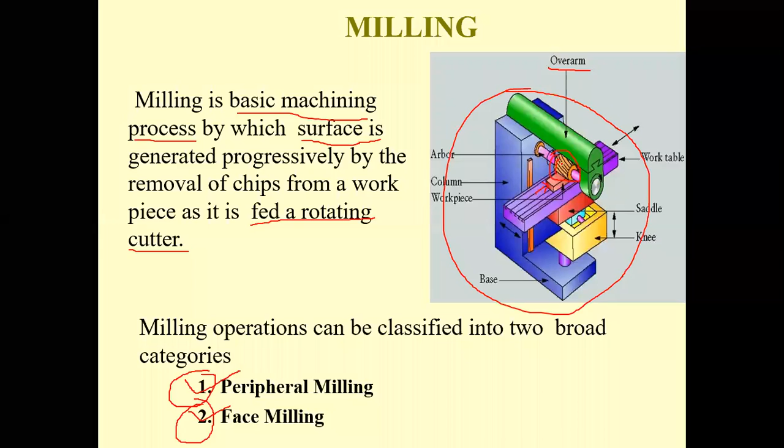Peripheral milling means whatever you're seeing in this diagram. If peripheral milling, whatever the milling cutter is in a circular form, so on the periphery of that circle you have cutting tools. If you take this as the circle, on the periphery you have one cutting edge, here one cutting edge, here one cutting edge, and here one cutting edge. The periphery of the cutting tool has cutting edges.

By these cutting edges, material is removed. This is the machined surface, and this is the unmachined surface. So some layer of the material is removed from here, at the periphery of the circle. That's why it is called peripheral milling. So this is one type of milling process.

The second one is face milling. Normally, as we have seen in the lathe machine, the end portion is called the face. If you consider this as a cylinder, this is the periphery, and this is the base, right? The base is nothing but the face.

If you're machining using the cutting edges at this particular side of the cutting tool, we call it face milling. Even though you have cutting edges on the periphery, the main machining happens because of the cutting edges on the face of the cutting tool. That's why this process is called face milling.

So these are only the two differences. If the cutting edges are on the periphery of the cutting tool, that machining is called peripheral milling. If cutting edges are on the face of the cutting tool, then that process is called face milling. These are the two broad classifications of milling process. So milling cutters can be classified into peripheral milling and face milling based upon the cutter type. Is it clear?

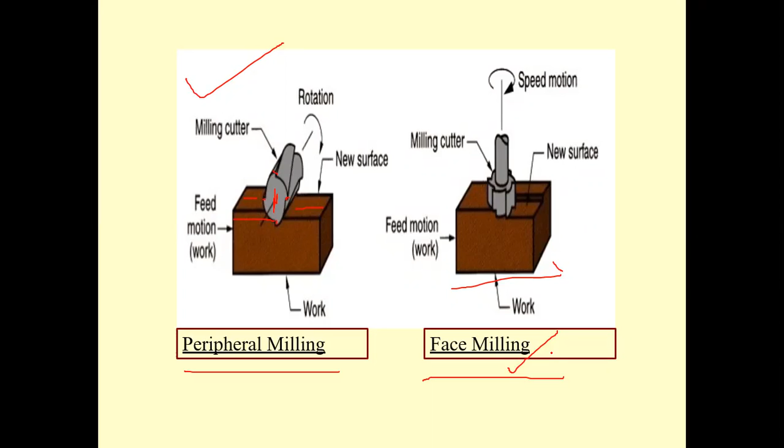So now let's see peripheral milling. This is a typical peripheral milling process or milling machine. In that peripheral milling, this is a three-dimensional view. Does anybody have any doubt or question?

Anybody have any question? Vizarat, you want to ask any question? Are you available online? Vizarat, are you able to hear me? Yes sir, so we mute then. If yes sir, I am available. Okay, then mute because disturbance is coming from your side. Yes sir, mute. Okay, if any question is there, any doubt is there, anybody can ask me anytime. You can unmute yourself and ask me the question. If no question is there, please mute.

This is the typical front view. As I told you, if this kind of question comes in the exam for 5 marks or 10 marks, please draw this kind of diagram. I'm not asking you to draw this exact one, but maybe you can draw at least one view, this view or that view. Any one view you can draw. If you want to draw two views, that will be better.

But only thing, when you're drawing anything in your exam, don't waste your time. Within the time, you can draw it properly. This is a typical diagram like this. Maybe you can practice drawing this in the exam, not that other kind of diagram, right?

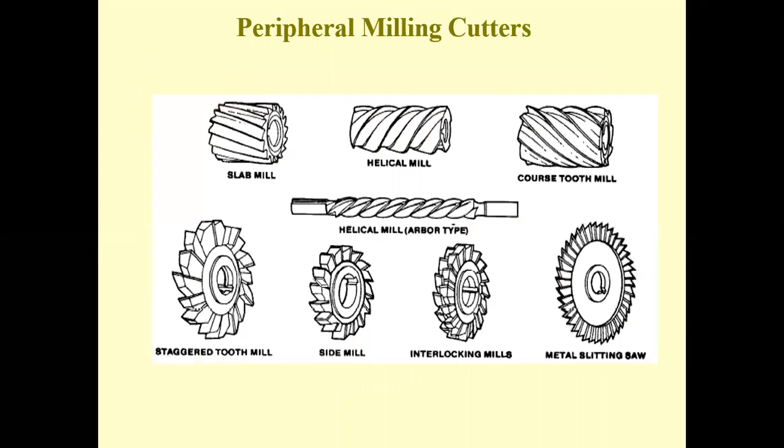So whatever axis you've seen previously, the axis of rotation is parallel to the workpiece. This is the surface of the workpiece, and the axis of the cutter is parallel to it. So always in peripheral milling, the axis of rotation and surface of machining is parallel - the axis of cutter rotation is parallel to the workpiece surface to be machined.

In peripheral milling, again we can classify different kinds of milling. Slab milling: normally cutter width is more than workpiece width, so the cutter width is extended. In the next slide you can see a typical slab milling.

Slab milling. Then slot milling is nothing but cutter width being very less than the workpiece width - it's very like slotting, which is very small. Whatever disc you've seen previously - normally a disc is used for slitting. So cutter width is less than the workpiece width, creating a slot - making a kind of slot or groove in the workpiece.

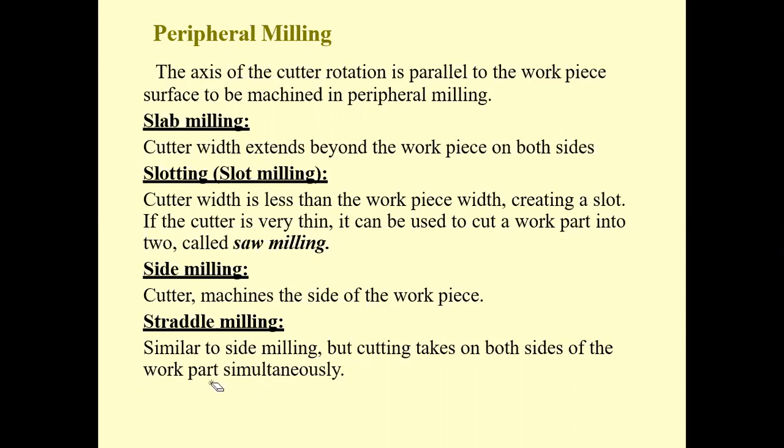Side milling is normally used for cutting the edges - the side edges, so the cutter machines the sides of the workpiece. Similarly, straddle milling cuts two sides at a time, similar to side milling but cutting takes place on both sides of the work part simultaneously. If side milling happens on both sides simultaneously, that is called straddle milling. Here's a typical straddle milling example.

This is a typical workpiece - both sides of the workpiece are machined simultaneously, that is straddle milling. Here is the side milling - only one side of the workpiece is machined, this layer of material is removed, this is called side milling. So straddle milling is side milling happening on two sides, while side milling is only one side.

This is a slot milling example, making some kind of slots. And this is form milling - one more important milling process. We have also studied form milling in the lathe. Whatever size or shape of the workpiece we want to make, we need to use a similar shaped tool. The impression or shape of the tool - those dimensions are transferred to the workpiece - this is called forming, nothing but form milling.

Your cutter is in a shape similar to the workpiece you are making. So this is called form milling. Here, if you take this, this is a different kind of cutter. Whatever shape the cutter is, that is what it cuts.

If you take this one, this is nothing but the shape of a gear teeth gap. Whatever the gear teeth is, a similar shape is there on the cutter. If you cut this material, whatever teeth gap is there gets cut, and when you remove the teeth gap, whatever remains is the teeth.

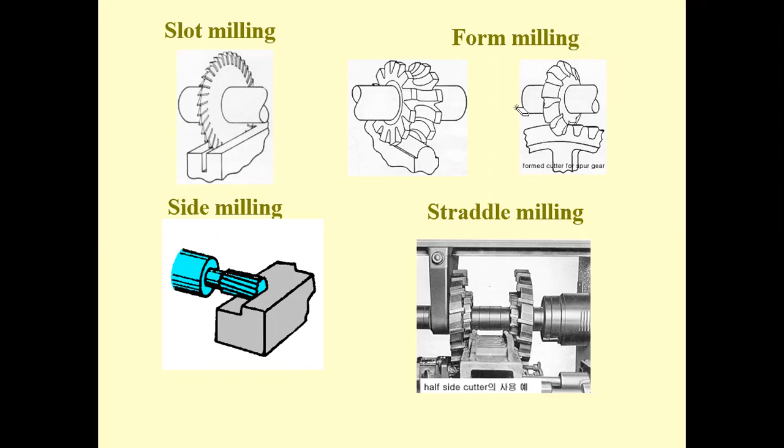This is a typical form milling process. Whatever shape of workpiece you require, a similar kind of cutter is used, and whatever shape the cutter has, that shape is transferred onto the workpiece. This is called form milling.

In addition to these milling processes, based upon the mechanism, milling is again classified into two different categories. This is the milling mechanism or milling process. Depending upon the cutter, we classified previously into peripheral milling as well as face milling. Depending upon the mechanism, we can classify milling into two categories: up milling and down milling. We will see these after the break.

Any student having any question, please ask me. So peripheral milling and face milling is classification based upon the cutter, but based upon the working principle, we can classify milling into two categories: up milling and down milling.

Always remember, in the milling process the cutter is rotating about its axis in a circular motion, and at the same time the workpiece is also moving forward, sliding in one direction. Linear motion is there in the workpiece and rotational motion is there in the cutting tool.

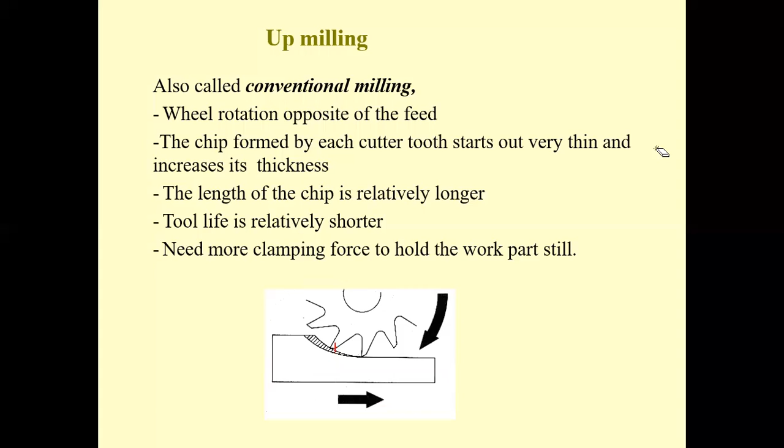So this is a typical down milling. Same process, same workpiece rotating in the same direction, moving in the same direction, but only one thing here - the cutter direction of rotation is changed. Previously it was this direction, now the cutter is rotating in this direction. The workpiece is moving in the same direction. The cutter rotation is changed now.

So if the cutter is rotating in this direction, what happens here? If you take the linear motion at this particular point, it is in this direction, and the workpiece is also in this direction. So the direction of cutter rotation as well as the movement of the workpiece are in the same direction. This kind of machining is called down milling.

So why is it called down milling? Because when the cutter is moving, whatever chip tip is there, when it is going down, at that time it is removing the material. That's why this process is called down milling. It's also called climb milling - down milling is nothing but climb milling. So previously up milling was conventional milling, and down milling is nothing but your climb milling.

The wheel rotates parallel to the feed. So as I told you, the direction of rotation of the wheel as well as the direction of the workpiece movement are both the same, both parallel and in the same direction.

The chip formed by each cutter tooth starts out thicker - quite opposite to previously. It starts out thicker, and as it goes on, the thickness of the chip is decreasing, because when the workpiece is touching, it is removing material maybe a little thicker at first. As it goes on, the thickness of the chip is reducing. It's quite opposite to up milling.

This is a topic that may come up as a question—people may ask you to explain up milling or down milling, or to explain the difference between up milling and down milling. So definitely a 2 marks or 5 marks question may come from this.

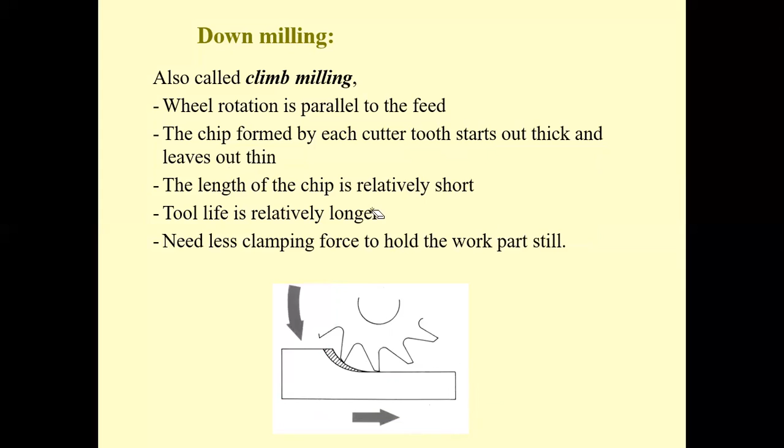Now coming to face milling. Up to now we discussed peripheral milling; now coming to face milling. So in face milling, what happens? The cutting tools are at the face.

Previously we had an arbor with a horizontal axis, and on that horizontal axis the milling cutter was mounted. Now in face milling, normally we have a vertical cutter—the cutter axis has to be vertical, not perpendicular, not parallel. This is typical and similar to a drilling machine.

If you look at the side view, this is typically like your drilling machine, right? In a drilling machine you have the same kind of drilling head where drill bits are mounted; here, instead of a drill bit, we have a milling cutter. A drill bit is normally used to make a hole, but this one does not make a hole—the main purpose of a milling machine is not to make a hole, but to machine the surface of the workpiece.

The small workpiece is mounted on the vise, and this is the cutting tool, using cutting edges at the end face of the cutting tool. That's why this process is called face milling. This is a typical face milling setup.

Taking the main parts, this is the vertical column, the machining head, and the cutting tool. Machine-wise, the main important parts of face milling and peripheral milling are almost the same—only the direction of the cutting axis changes. The work holding device, the table, cross traverse hand wheel let you raise and move the table. This table is normally called the knee in milling machines, and this is the vertical traverse; we can adjust the table similar to the previous machines we've seen.

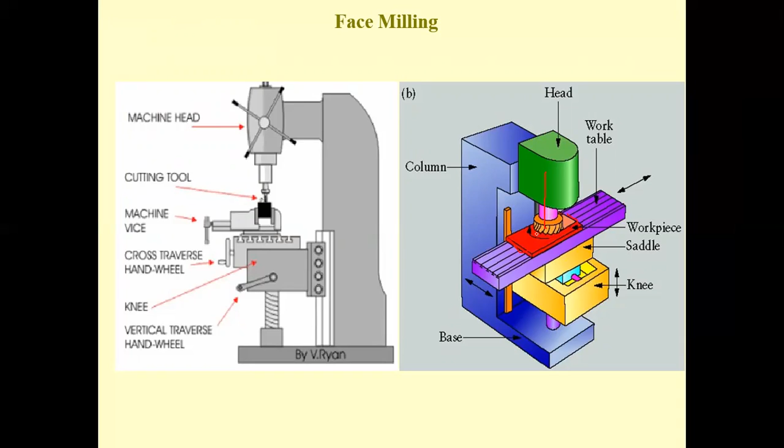Cutting mostly happens by the edges. In some cases, whatever cutting edges are there at the periphery also do some cutting, but that cutting is very small. Most of the cutting happens by whatever cutting edges are on the face of the milling tool, which are on the end of the cutter. Those cutting edges remove the material.

Most of the cutting is done by the periphery portion of the teeth, while the face portion provides some finishing action. So in this, whatever is there, it is the end portion only doing the work. This is a very small correction, small machining done by the peripheral portion, and the major portion of the machining happens by the surface on the end of the cutting tool.

So this is doing only finishing. The peripheral tool is only doing the finishing process here.

So conventional face milling: the diameter of the tool is larger than the workpiece. Similar to slab milling, in the conventional face milling process, the width or diameter of the cutter is more than the width of the workpiece, so that in a single pass you can finish the machining.

In partial face milling, the cutter overhangs from one side of the work part. Maybe in the next slide you can see this typical overhanging. So if you take here, this is the conventional face milling.

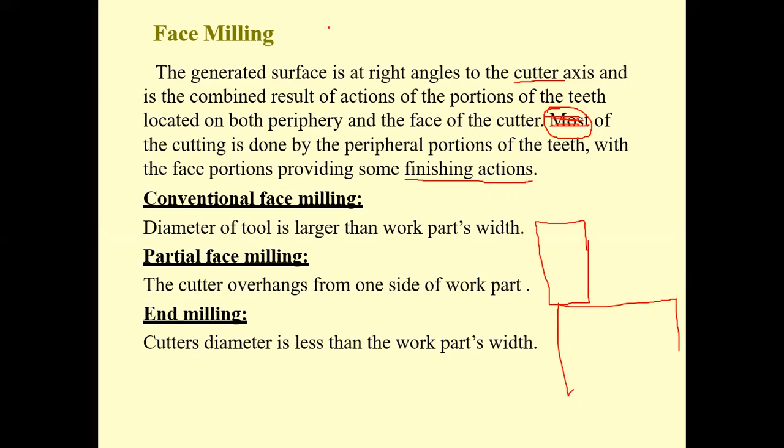Then what do you need to do? Multiple passes are required. Once you move from starting point to ending point, then again you need lateral movement. The lateral feed has to be given to the workpiece. The workpiece has to move in this direction, and your cutter has to come at this particular position, then move like this again. This way the complete machining happens, requiring more travel passes.

For example, for this size, 3 to 4 passes are required to complete one surface machining. That's why this is called partial face milling. The full face is not covered by this cutter, only partial face is covered. That's why you call it partial face milling.

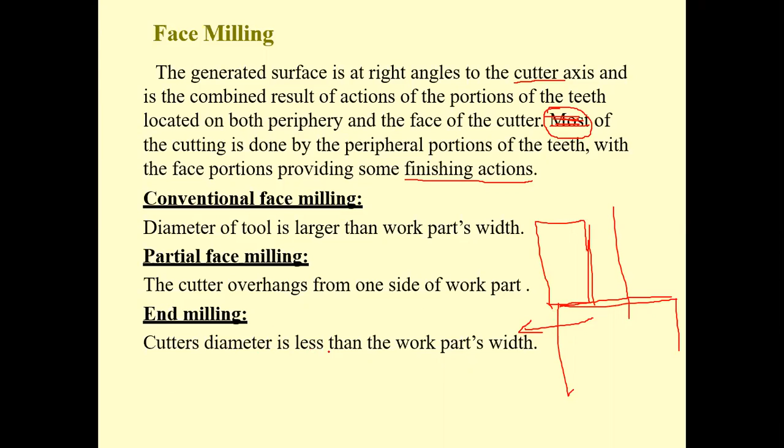The cutter overhangs from one side of the workpiece, so this may be overhanging sometimes. And end milling: the end milling cutter is normally used only for ends. If you're machining only ends, it is called end milling cutter, where the cutter diameter is very less than the work part width.

Then profile milling. Profile milling is used when you want to cut different kinds of profiles, like uneven or curved surfaces. This kind of process is also possible with face milling, and is called profile milling. Maybe this kind of profile has to be cut, like a circular profile, or elliptical or parabolic surfaces. This is called peripheral profile milling.

Whatever the periphery is there, in peripheral milling, whatever shape and dimensions are required, you cut the material to that dimension. Similarly, pocket milling is nothing but groove milling, making some kind of pockets into the workpiece, similar to end milling, but the shape created is a shallow pocket in a flat surface, maybe this kind of thing.

So pocket milling: in groove milling, normally you use the same size cutter throughout. But in pocket milling, a bigger size cutter can remove the material. The end milling cutter or face milling cutter is used, and this face milling cutter acts like a drilling process.

In drilling process, what you used to do? You used to remove the material in circular shape, because you're having primary cutting edges on the outside. So you need to make the hole, and then we can drive the cutting tool, whatever the dimension and shape you want to keep. Your cutting tool follows this direction, and finally you're going to get this kind of pocket into the workpiece. This kind of machining is called pocket machining or pocket milling process.

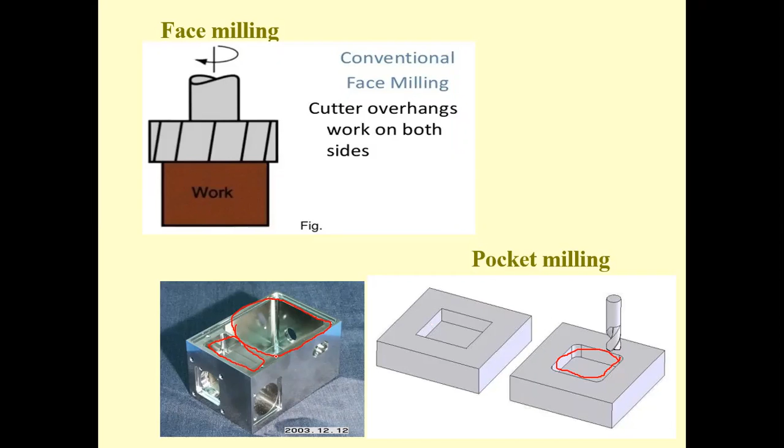So maybe you see a typical rectangular block or machine. This is one typical rectangular groove, and big rectangular holes or pockets are made in this. So this kind of process is called pocket milling.

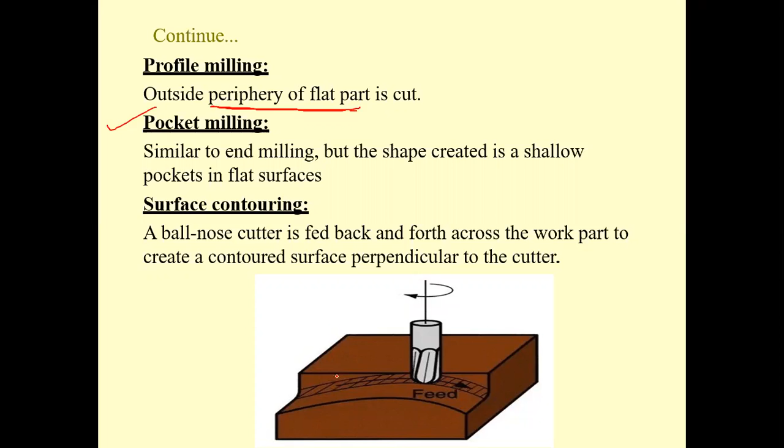And this is the surface contour. In surface contour, a ball nose cutter is fed back and forth, moving front and back, and we are making a contour kind of thing on the surface of the material. So this kind of milling process is called surface contouring. On the surface, you're making different kinds of contours.

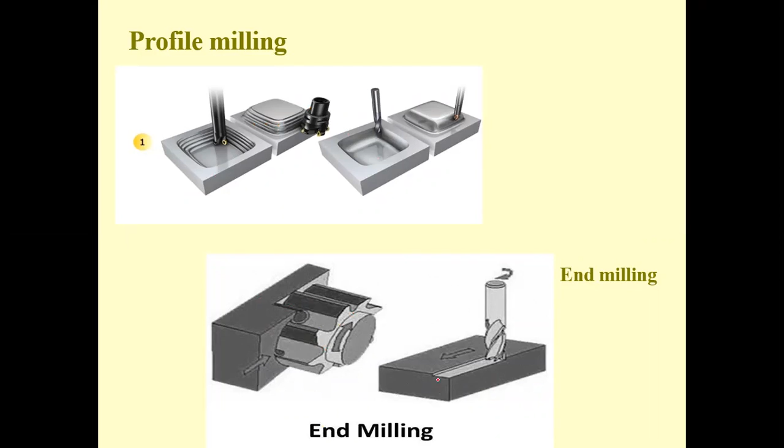So profile milling means whatever the profile is there, you can make that kind of shape or profile. Profile milling, end milling - end milling normally uses the ends of the workpiece to be machined.

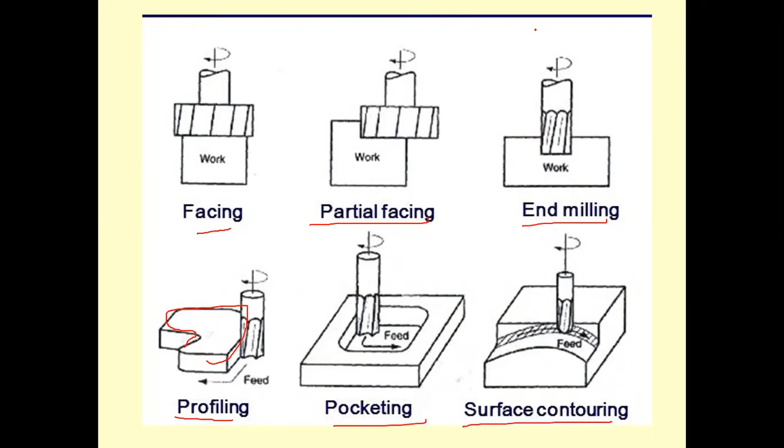So profiling, pocketing - pocketing is nothing but making some kind of internal groove, some typical shape of the internal surfaces. And surface contouring - different kinds of contours on the surface is called surface contouring. So these are the basic end milling processes. Surface milling as well as end milling, peripheral milling as well as end milling, both are very popularly used in milling process.

So a few more examples of face milling is shoulder milling. So if it is machining at the...

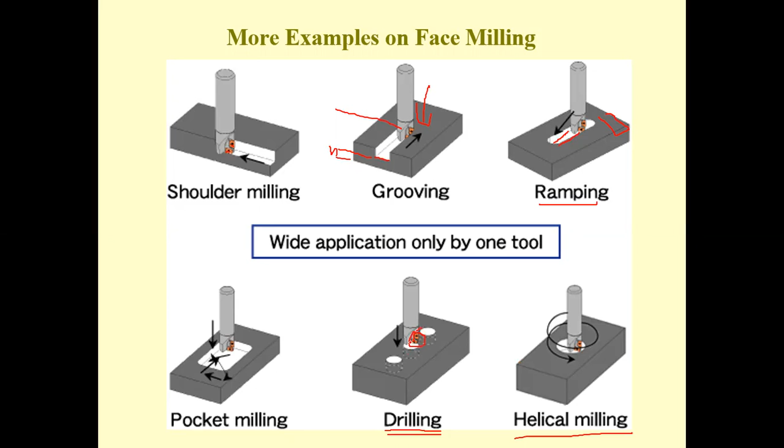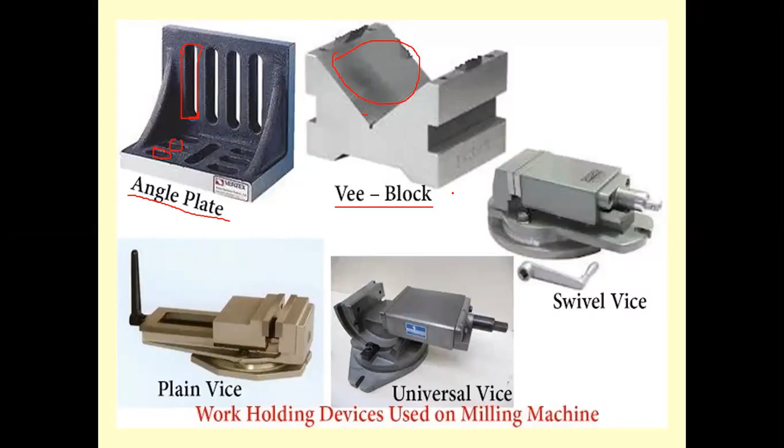Then there are popular holding tools whatever is there, most popularly used on smaller workpieces. So these are the few work holding devices used for the milling process, normally used for small to medium workpieces.

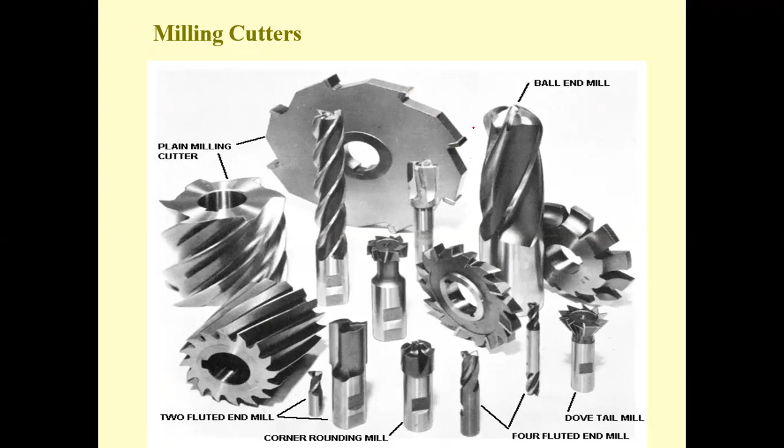Coming to milling cutters, different kinds of milling cutters - the tool used in milling is called a milling cutter. The cutting edges are called teeth. Whatever cutting edges are there, on the periphery or on the surface, that is called the teeth.

The types of milling cutters are related to the milling operation. Depending on the milling cutter, milling operations can be classified as plain milling cutter as well as side milling cutters, whatever you just saw.

Any questions? Any questions? Ahmad bin Kursain, any question? No, sir. So why did you then switch on your mic? Mute your mic. Yes, sir.

So based on the milling cutter, different types are there - plain milling cutter as well as side milling cutter. Plain milling cutter is normally used in peripheral milling operation, cylindrical disc shaped, having several straight or helical teeth on the periphery of the cutter, used to mill flat surfaces.

Similarly, for the side milling cutter, similar to the plain milling cutter, teeth extend radially partway across one or both ends of the cylindrical tool end. Side milling cutter is similar to face milling, relatively narrow - its dimensions are smaller than the plain milling cutter.

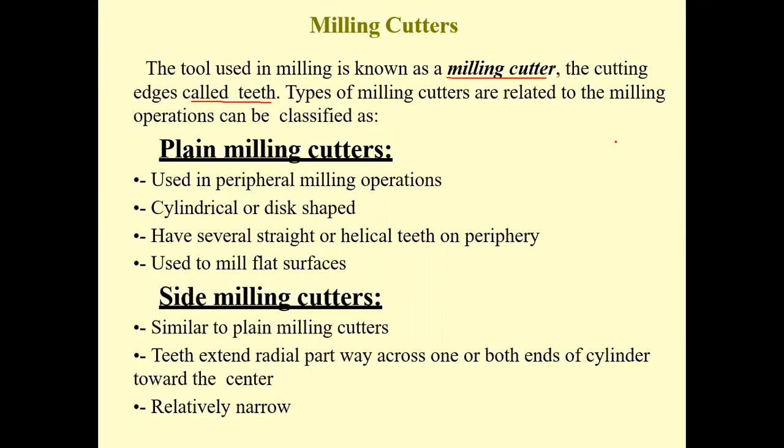Coming to the milling cutter, take this typical helical milling cutter - whatever the cutting edges are there, they are not parallel to the axis of rotation, making some kind of inclination. This is called a helical cutter.

Whereas this is the plain milling cutter, where the axis of rotation and the cutting edge are both perpendicular, parallel to each other. This kind of thing is called the plain milling cutter.

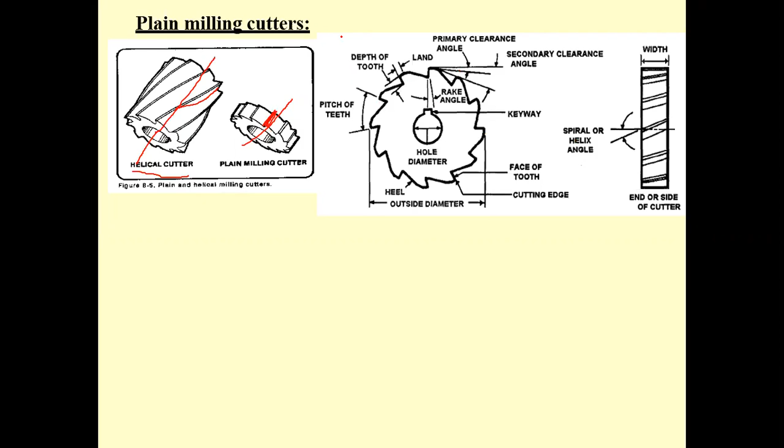If you take the nomenclature of the cutting tool, nothing but your milling cutter, this is a typical milling cutter. These are the cutting edges, similar to your single point cutting tool which we discussed in the first unit - same thing. In that, you have some clearance angle, some rake angle, everything is there.

If you take this one, this is one cutting tool, one cutting edge - like this, you have multiple cutting edges in each cutter. Whatever portion is there which is not directly coming in contact with the workpiece is called the land, and this portion is called the flank, face.

So this is the face and this is the flank, because once material is removed, your material is coming on this surface. That's why this is called the flank, and this is called the land. And whatever depth is there, this length, how much depth of this edge, that is called the depth of cut, nothing but depth of tooth. So this much thickness of material can be removed in one pass. This is called the depth.

So pitch of the teeth is the distance at which - this is one cutting edge and this is another cutting edge. So the radial distance between successive cutting edges is called the pitch. Pitch is nothing but the circumference, diameter of the circle divided by the number of edges, how many cutting edges are on the surface. That will give you the pitch of the teeth. This pitch is similar to the pitch you studied in gears.

So these things, definitely these possibilities are there. This may come for 2 marks or maybe 5 marks.

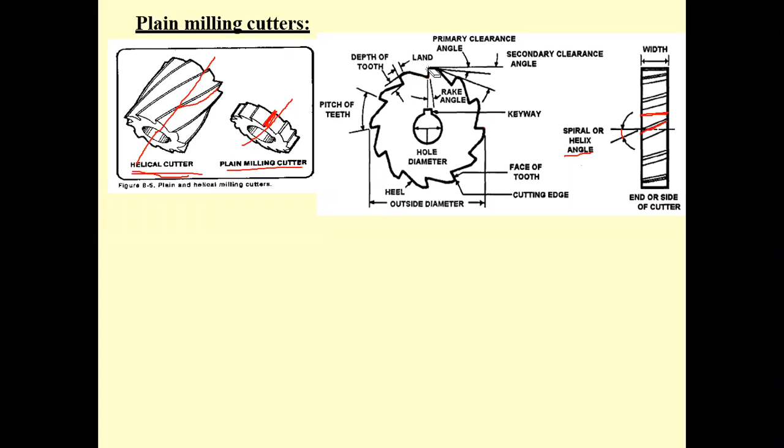Coming to the next one, this is a typical peripheral milling. Not only this kind of thing, but even different kinds of shapes will be there in peripheral milling. This peripheral milling cutter, maybe previously I have shown, similar kind of things are here. The same thing, if you take this, the same thing is here.

If you take the side view, or your cross sectional view if you say, it looks like this. The cutter looks like this.

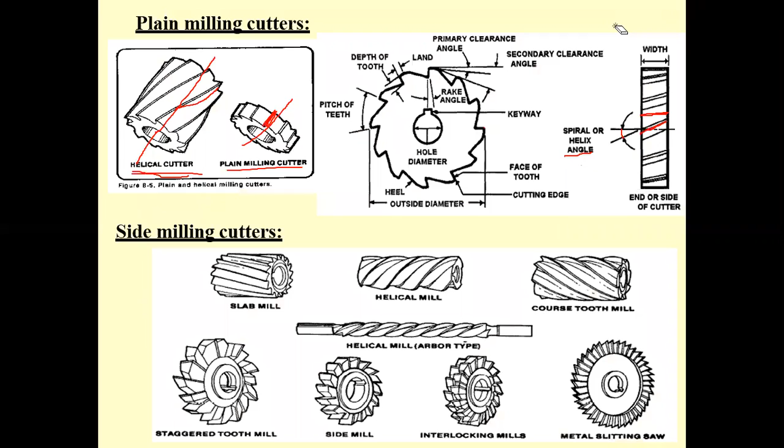The form milling cutter, another peripheral milling cutter I think we discussed previously, is a peripheral milling cutter because we transfer whatever shape is in the cutter onto the workpiece. That's why this is considered another peripheral milling cutter. Teeth are ground to a special shape to produce a surface having a desired transverse contour, convex, concave, whatever shape is required. The same kind of shape we make on the tool, we transfer onto the workpiece. There is an end milling cutter used for end milling.

It looks like a drill bit, but it cuts with the peripheral teeth instead of its end. It has multiple teeth. The end milling cutter is even used for drilling. In end mills, both the end cutting edges and the peripheral cutting edges are involved in the cutting action. So it has multiple teeth, normally every milling cutter has multiple teeth, and it's used for milling slots.

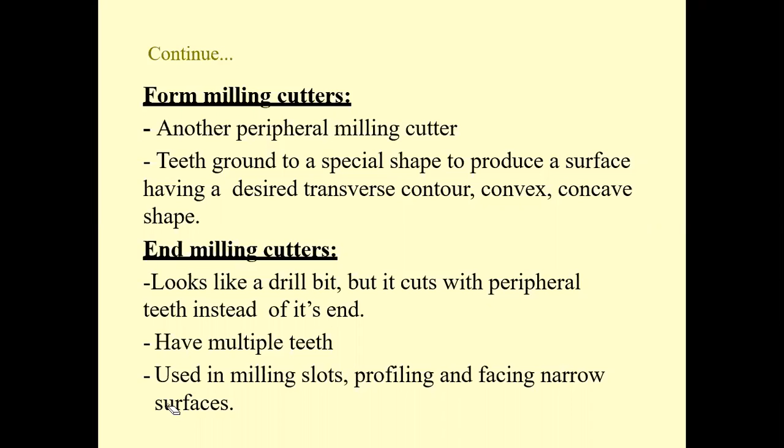End milling cutter is also used for milling slots, profiling, and facing narrow surfaces. All these different processes, profile milling, contour milling, normally use an end milling cutter.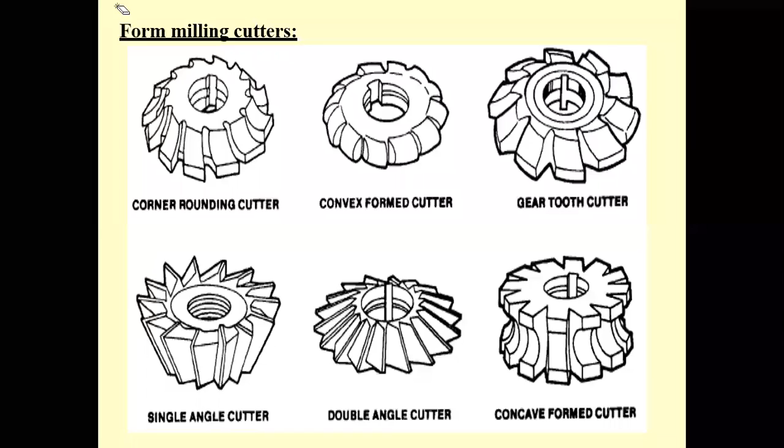So you know what is concave and convex. Both convex and concave shapes can be cut using this milling cutter. Whatever different shapes are required on the surface, all these kinds of shapes can be made using this kind of milling cutter. So this is a typical end milling cutter, which normally has cutting edges at the end of the milling cutter.

The face milling cutter has teeth on the periphery and both sides, made of high speed steel. But one more important thing is the T-slot cutter. The T-slot cutter has teeth on the periphery as well as on both sides, and wherever the teeth are, those teeth cut the workpiece. That kind of tool is called a slot milling cutter.

And T milling, this is a typical T milling cutter. You see there are edges, so if you move the cutter it removes the material. Maybe I can show this typical peripheral milling T-slot milling cutter. It has teeth on the periphery and both sides, used for milling wide grooves or T-slots.

Whatever T-slots you see on your work table, all these T-slots are normally made using a milling machine. In order to make them, a vertical groove must first be made. Normally for groove cutting, groove milling, let me show what you need to do.

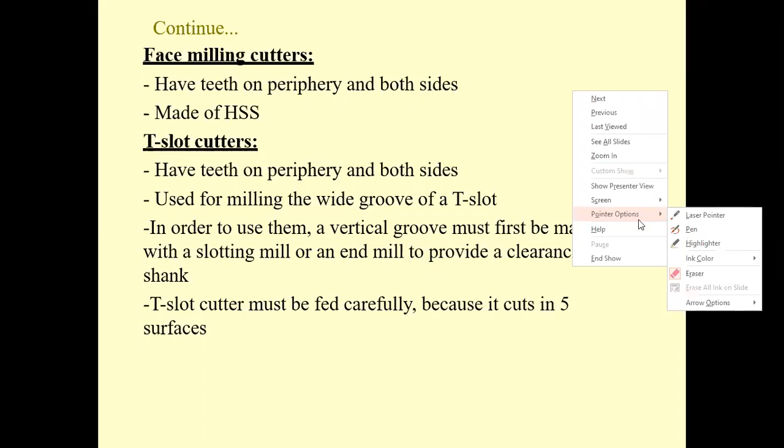If you want to make this typical T groove in the table, for example, right, this is a table. If you want to make a T groove like this in the table, what do we need to do? First we need to make this kind of groove, then you can put a single point cutting tool and remove the remaining material from here, right?

If you're using this T-hole, your T-hole is similar to this groove. At the periphery, you have cutting edges, as well as on top you have cutting edges. So you have cutting edges in this direction, as well as in this direction. Cutting edges are there.

When you keep this at this particular position and move perpendicular to this screen, what happens? Because this periphery is circular shape, all the cutting edges are there. So as it's moving and touching the workpiece, this kind of slot is moving onto the workpiece.

For example, if you take the side view of this, I can draw it here. Your cutting tool is moving from this direction. As it's going perpendicular to this, whatever the shape of the tool is, the same shape groove it is making. So this is a simple process.

If you're using a T-slot cutter with single movement from one direction to other, when the tool rotates, you will make these T-slots. So the T-slot cutter is very simple. If you don't have a T-slot cutter and want to use a single point cutting tool or an end milling cutter, first you need to make this, and then remove this material. It's a very long process.

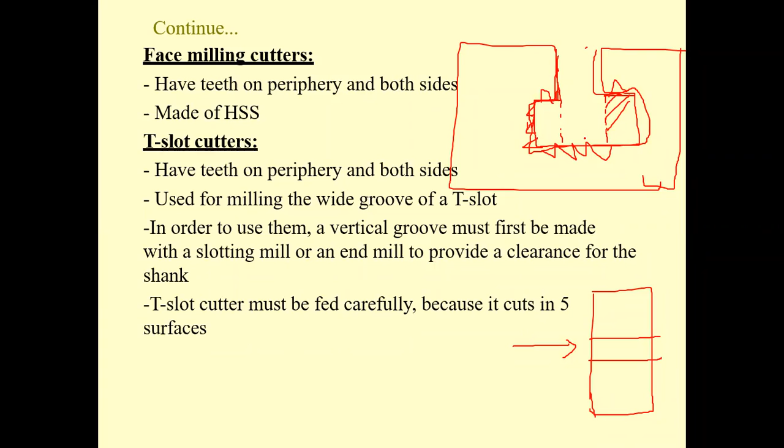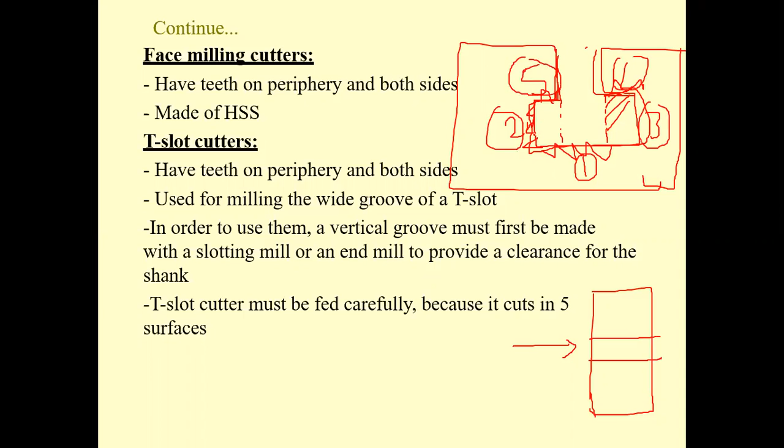So in order to use them, a vertical groove must first be made with a slotting mill. The T-slot cutter must be fed carefully because it cuts on 5 surfaces. This is surface 1, this is 2, this is 3, this is 4, and this is 5. Like this, 5 surfaces used to have cutting edges, so it machines 5 surfaces. That's why you need to be very careful when machining T-slots.

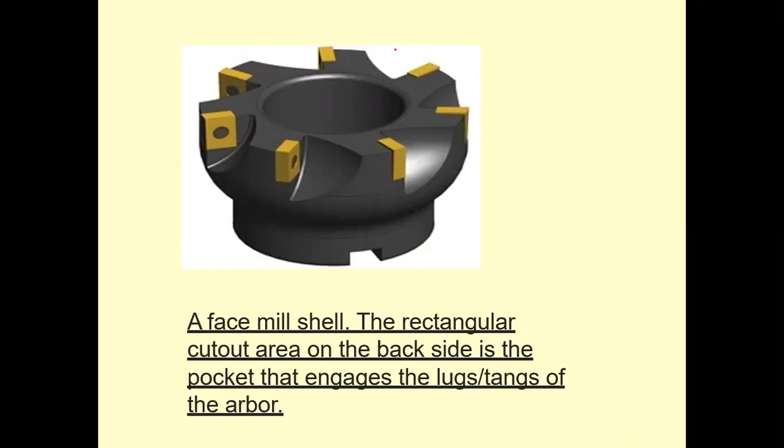So these are the typical T-slot cutters, or face milling cutters also. The face milling shell has rectangular cutouts on the back side. This is a typical model tool - this is a teeth, this is a cutting edge, this is your face, and this is the land. So you have multiple cutting edges in a circular cutting tool.

So this is a typical T-slot milling setup. In this, you have cutting edges - here you have a cutting edge, this side you have a cutting edge, and this back side also has cutting edges. Like this, all 5 sides need to have cutting edges.

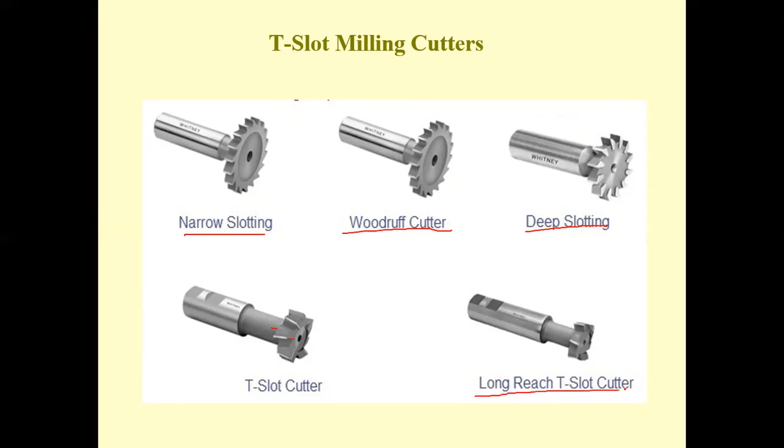Narrow slotting uses a Woodruff cutter. For deep slot cutting, if you want to make it more deep, you can increase using a long reach T-slot cutter. So these are the typical T-slot cutters available.

Again, whatever we discussed, let me just remind you, since our time is coming to an end. Whatever you have seen is slab milling - this is one of the peripheral milling processes.

The cutter length is more than the width of the workpiece, so with a single pass it's complete. And face milling - the end faces are used for the milling process, in end face milling. End milling normally uses cutters at the end as well as at the periphery, to make some kind of grooves or pockets in the workpiece.

Straddle milling is nothing but side milling, but here end milling is done in both directions simultaneously together - straddle milling - and then form milling. These are the basic milling processes and milling cutters in milling.

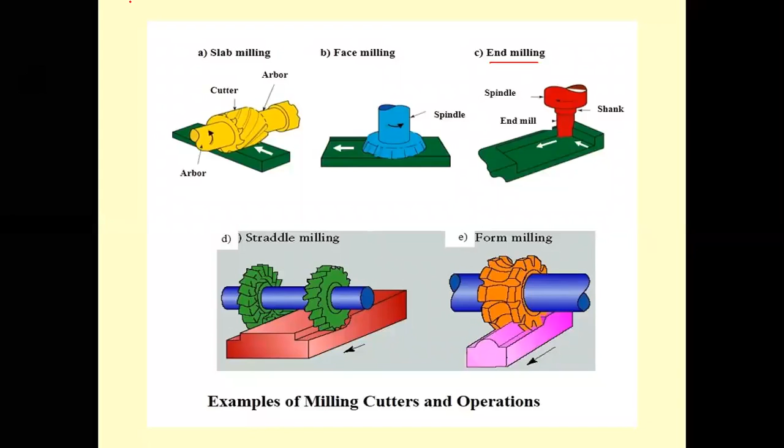Milling machines we can see in the next class. Today we discussed milling mechanisms, milling processes, as well as milling cutters. If anybody has any questions from today's class, please ask me. Milling machines and types of milling machines you can see in the next class.

Yeah, in periphery milling, that is a tool...